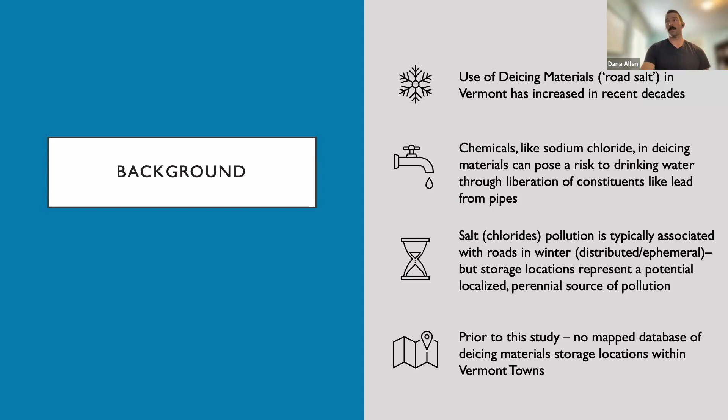But storage locations for this material represent a potential localized perennial source of pollution. So these are facilities that are there year round, that may have risk factors associated with them. And prior to this study, there was no mapped database of de-icing material storage locations anywhere in Vermont. I checked, I tried to find it for other research, it didn't exist. And so essentially that was one of the inspirations for this. We didn't have the information we needed to build on and to create other studies. So that's what we did within the Lake Champlain Basin, is created this new database.

So the study goals essentially were to survey the municipalities in the LCB, to map their de-icing material storage facilities, but not just for location, also for material type, and maybe more importantly, storage methods. Are they covered? Are they not covered? What are they covered with? Are they on an impervious pad or not? Because if we're talking about groundwater, we have to talk about exclusion from groundwater. How long have they been stored there? If it's a newer site, maybe there's no residual risk. If it's been there for 10 plus years, potentially that is a higher risk. So we wanted some attributes as well.

And then we wanted to analyze those facility locations with respect to distance from private wells and public water sources. We wanted to make an estimate of hydraulic down gradients. We'll get into that in a little bit, but that's a relatively complex thing. We also wanted to look at school water sources, because children are potentially at higher risk for some of these factors. So could we tease out any details there?

And then we also wanted to get at, are these facilities located closer to vulnerable communities? Is that something that we can actually pull out of the data that we have? And that is where the environmental disparity index came in handy for us, in trying to tease out some of those details.

So basically in today's study, we already talked about the background of the study goals. We're going to go through the methods that we used to map municipal and VTrans de-icing material storage facilities. We're going to talk about how we selected the wells and the water sources that are quote unquote in proximity, how we compared it to the EDI, and then how we determined school proximity to some of these de-icing material facilities and their wells. And so we're going to talk about the locations and descriptions of those facilities, the wells and the water sources down gradient, the results that we found with the EDI, as well as school proximity, and then briefly conclusions, but maybe more importantly, the next steps as well, because this is the first step in hopefully what will be a multi-step process.

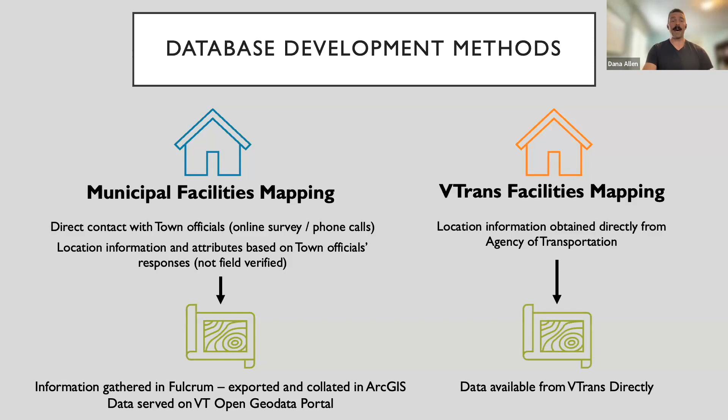So the wells and the water sources, these mapping methods, these are both publicly available layers on the Open Geodata portal. Again, can't say enough about the Open Geodata portal. We're so lucky in Vermont to have that. But the private wells are something that is held and developed by Vermont Agency of Natural Resources, and it's their water supply data composite and their water well advisory committee data.

And this is water well data that's been delivered through the water well driller licensing rule since 1966. I think that's important to keep in mind. We've been collecting these reports since 1966. Data quality may vary. So spatial inaccuracies or incomplete data are definitely part of this data set, but it's the best we've got. We've got 110,000 reports in there.

It's important to keep in mind that it's not all drinking water wells necessarily. Monitoring wells and geothermal wells are included in there, as well as wells that have been closed. And so for our purposes, we basically looked at anything that's in there. And so this could be for single family homes, public buildings, subdivisions, or public water supplies. So again, there's a lot of nuance in this data. We just looked at the locations themselves in determining proximity and down gradients.

For the public water sources, we just use the Vermont DEC's state drinking water database, which includes active and inactive public, which are community, non-transient non-community, and transient non-community water sources. These can be wells. They can also be intakes or springs. So lakes may be included in this.

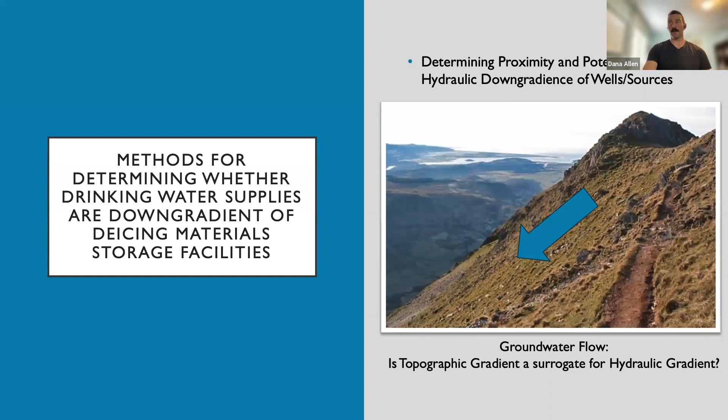And the funding for this project didn't really allow us to do any specific groundwater modeling or sampling. So we made a bunch of assumptions and we have a bunch of caveats. And we thought that this was a pretty good way of getting at the first cut of what might be down gradient. But we basically used topographic gradient as a surrogate for hydraulic gradient. Now, is that always true?

Well, the next slide, which has really high-tech animations, will kind of illustrate that. Over here, if we have water hitting the surface of the ground and all things being equal, it'll generally follow the topographic slope of the ground. And that's just sort of a general assumption. So that's topo equals hydraulic. So anything that's downhill of that rainwater, it is going to be downhill of the groundwater.

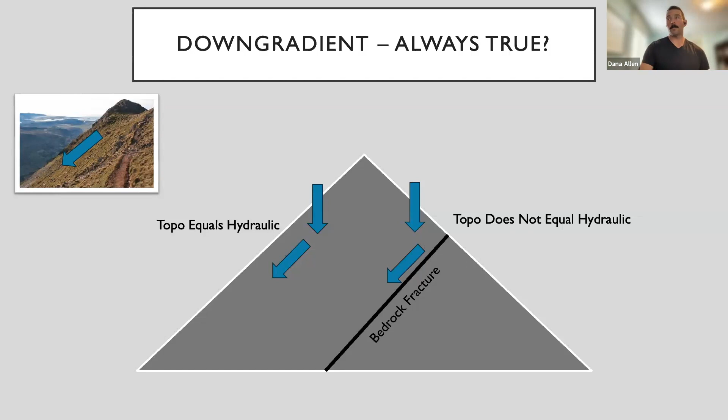Now, what happens if we get into a situation where when the rain hits the surface, it then hits a bedrock fracture, which sends it in an entirely different direction than topographic gradient? We didn't take that into account in this. We don't necessarily have the data to do that for a nearly statewide, basin-wide study like this. So topographic gradient is not always going to equal hydraulic gradient in areas of things like bedrock fracture. So that's one instance in which topo doesn't equal hydraulic.

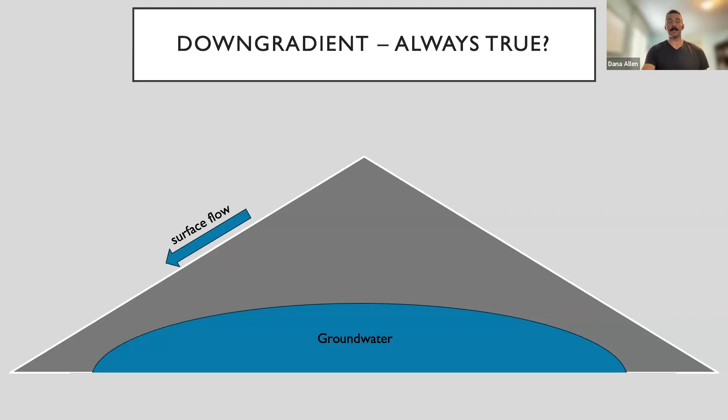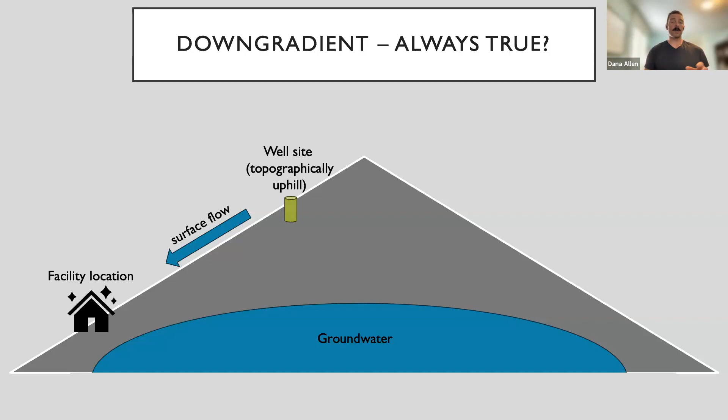So you could say, okay, it's topographically uphill of the facility. There's really no risk because it's uphill. There's not going to be any groundwater contamination from that. But that's not necessarily true because that's not how wells and groundwater work.

You could have a well that's topographically uphill of a facility that then actually taps into the groundwater that is hydraulically downhill of that facility, or down gradient. So these are the limitations of this method.

They're not perfect. They are a good first cut, and they give us a way to look at a lot of different points and get an idea of how many wells or how many private or public water sources are potentially downhill of these facilities or hydraulically down gradient of these facilities. But it's not predictive in the way that true groundwater modeling and testing would be.

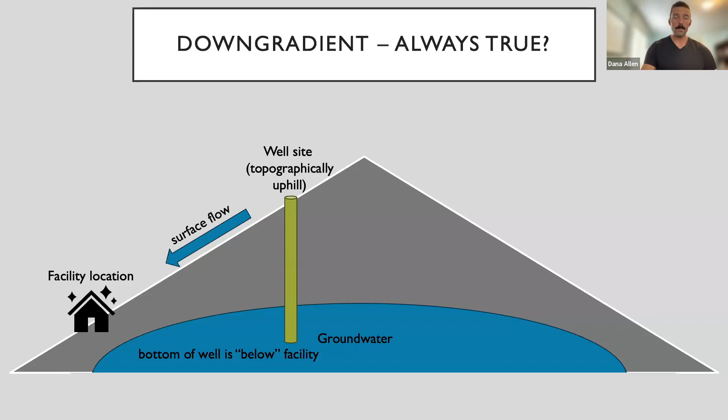So that's a big caveat with this data, and we just wanted to get that out there first in an attempt to make sure that everyone understands the limitations. So the other thing that we did here, basically an extension of this method, is saying, okay, topographic gradient stands in as a proxy for hydraulic gradient.

So we're able to assign the wells and the water sources an elevation using the LiDAR DTM. Again, we have a great statewide LiDAR DTM, digital terrain model, so bare earth surface. And we were also able to assign each facility an elevation. So then we can pretty well figure out what's above and what's below, at least based on ground surface.

And then we also used five selection distances of 30, 60, 100, 200, and 300 meters as our selection method for proximity, and we'll explain a little bit why we chose those. We also use the National Hydrography Dataset high resolution catchments for drainage area boundaries. These are really fine scale drainage area boundaries for water, so they show you where surface water flows.

Again, we're just using topographic gradient as a proxy for hydraulic gradient. We're saying, okay, if these fine scale catchments show where surface water goes, that could be a proxy for where groundwater flows. So that was our other selection method. So buffers and catchments, and you'll hear a lot about this in our data. Why did we choose those distances? Well, we chose them based on the literature.

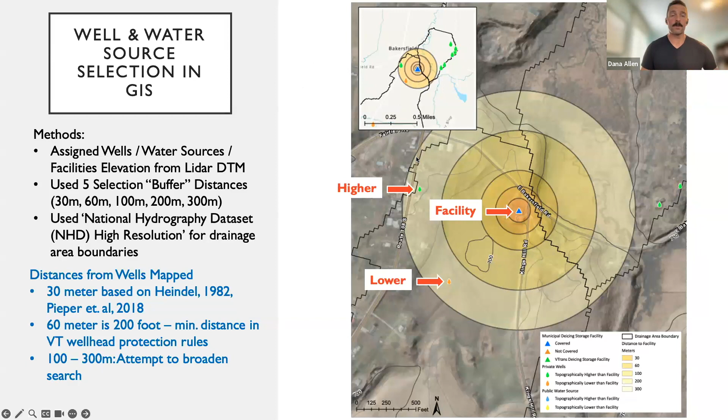You can see these are the catchments here, those high resolution catchments. We capture a few more wells. And again, these green ones here are generally higher than the facility topographically, whereas some of these little orange ones down there are lower. And so that's how our data breaks down. So those are the maps that we produced.

Getting into the Vermont EDI, this summarizes social vulnerability, and it looks at health risk factors and environmental risk factors at the census block level. And that's important to keep in mind, census block level. And so the EDI is basically environmental exposure multiplied by health risk times 0.5, plus social vulnerability times 0.5.

And you can go online. Again, this resource is huge. It's online, it's interactive, and you can see how they developed this environmental disparity index. It's a great resource. So we won't go into all of that here, just to say that we use the EDI to compare with our data.

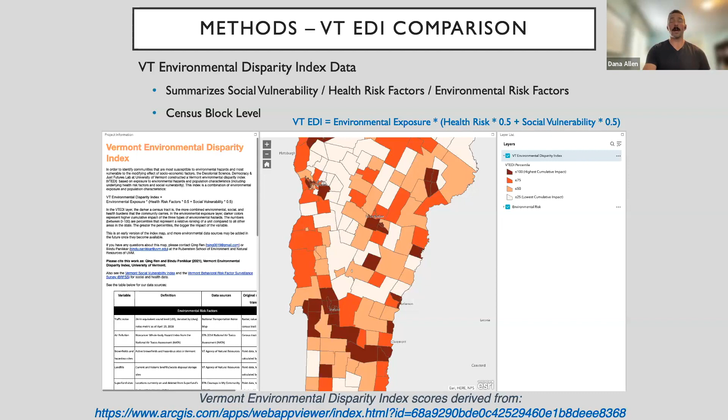I mentioned that it's at the census block level, and that's important because that's not always equal to town boundaries, especially in places like Vermont, where we kind of aggregate some of these towns into census blocks. So we essentially just join the EDI values with our town boundaries. And then we're able to select towns with mapped facilities and the associated EDI.

We also ran a near function with each well and water source, so it assigned a distance in meters to the nearest facility. And what we wanted to do with that is basically see if there was a relationship where wells that were near to facilities fell within communities with a higher or lower EDI. And so that's why we ran that near function. We'll get into that a little bit in the results.

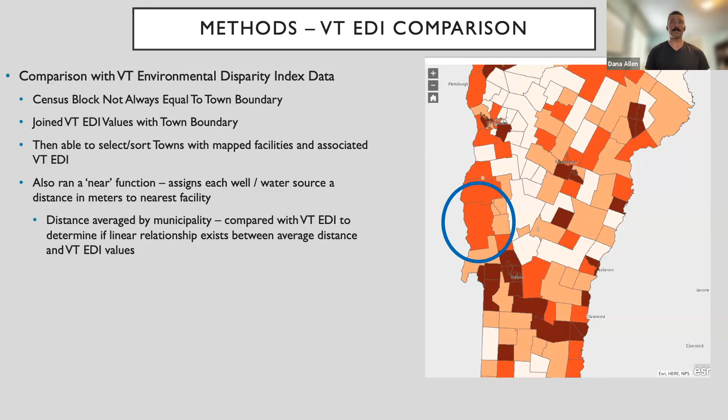We also averaged this distance by municipality and compared that with Vermont EDI to determine if there's any linear relationship between the average distance and the EDI values.

So then we wanted to look at determination of school well proximity to deicing material storage facilities. We did our best to pick out the relevant data from the private wells and the water sources database, and essentially just keyworded where the owner's or purchaser's last name contains school, or where the water source system name contains school.

And so that was how we derived the water sources for those locations. We'll talk a little bit about that in the next steps, but just keep in mind that there's no mapped database of school wells or water sources that we were able to leverage. It's just leveraging those same two databases and picking out what we could pick out.

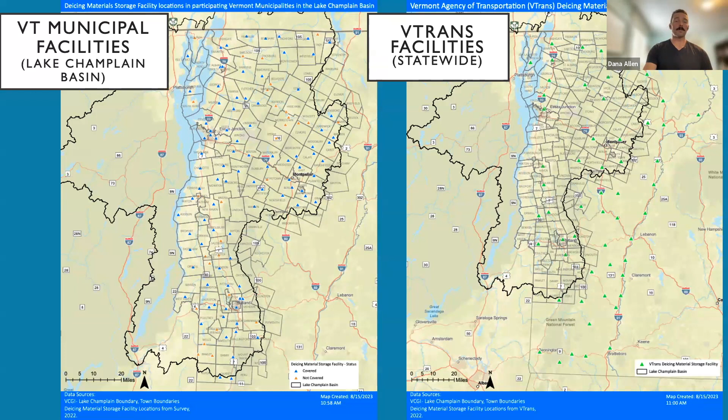So from all this, we were able to create essentially two overarching maps, one of the Vermont municipal facilities within the Lake Champlain Basin, to signal whether they were covered or uncovered, and then a similar product for VTrans facilities. We'll talk about the difference, but you can see that these are the overarching maps that we were able to create of those two different data sets.

So for the municipal facilities results, we essentially picked out 126 muni boundaries in the Lake Champlain Basin. Of that, there were a couple of gores, so they don't really have a formal administrative structure. One, St. George, had no road department. They only have 2 miles of road, so they rely on a private contractor. A couple of towns share facilities. One town chose not to participate, and 2 towns, despite repeated contacts, didn't respond back to us.

Again, Oscar, thank you for your diligence. Sometimes people don't answer the phone.

So basically, at the end of the day, we have 122 facility locations over 118 towns. 4 towns have 2 facilities. 43 towns store multiple materials, so things like salt and sand, as well as road salt. And so that basically gives us 170 individual material piles throughout the basin.

36 of these, or about 21%, within 29 towns are uncovered. But the majority of those, at least from what we were told, are salt and sand piles, or 8 of them, they say, are only sand or sand and gravel piles. So in terms of materials, this kind of makes sense. If you leave salt out in the rain all the time, you're not going to have salt after a certain period of time.

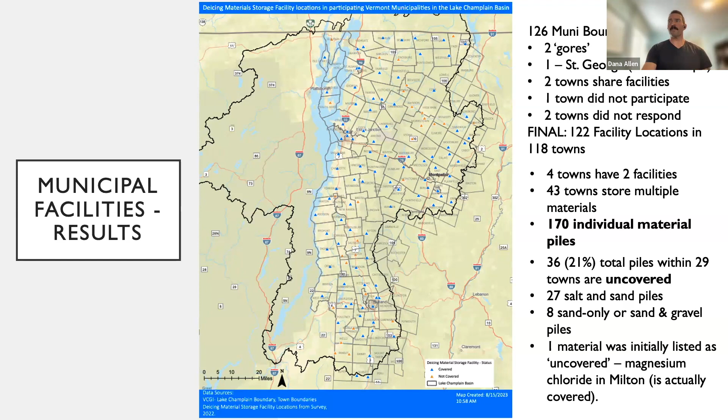One material pile was initially listed as uncovered, but actually it's a magnesium chloride store in Milton and is actually covered. We checked with them. So the results are a little bit off there, but we figured it out.

For VTrans, they have 124 facilities across 63 towns. This is both in the Lake Champlain Basin and without. The specific attributes for all of these weren't provided, so coverage method, pad type, storage duration, material type. But in conversation with VTrans, they state that all of these piles are covered and on impervious pads. So basically best practice as far as that goes.

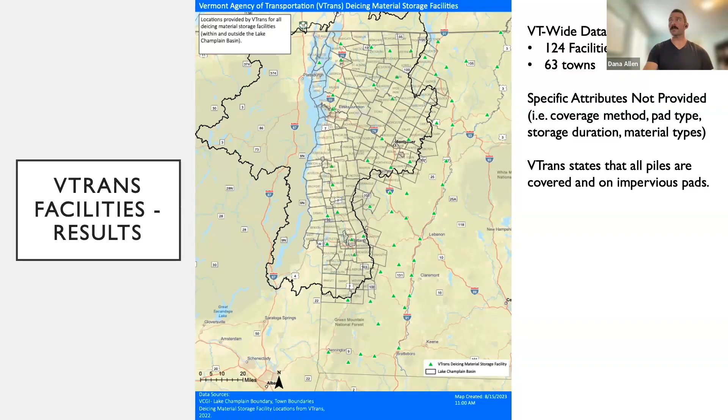What are the material types we're looking at? Most are sodium chloride, road salt. 24 piles are salt and sand. Not a lot of potassium chloride, one of those. A few magnesium chloride.

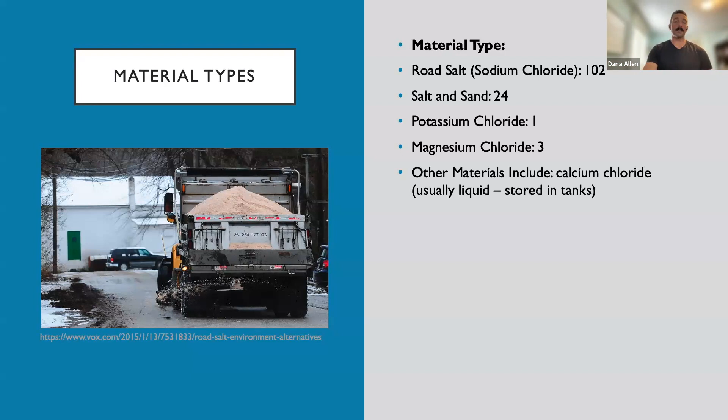Potassium chloride and magnesium chloride are often used at different temperature gradients than road salt, so not as common. And other materials include calcium chloride, which is usually liquid, so that's a brining solution essentially. So that's going to be stored in tanks, so by definition, kind of covered.

We found that for the most part, these sites have been active for 10 plus years. 151 sites, I should say sites, not towns, have been there for 10 plus years. Coverage method is typically structures. 127 piles are covered by structure. 7 were covered with an impermeable membrane, so a tarp essentially. Most are on pads. Pad type does vary, but at least most of them are on these pads. So it's preventing material, if there is some level of water intrusion, from getting into groundwater.

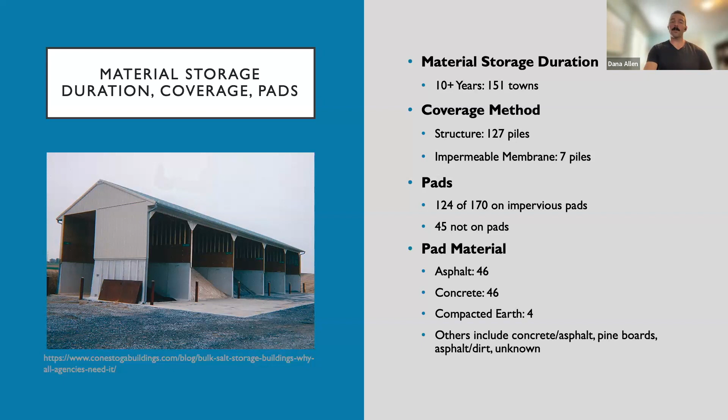45 are not on pads. Most pad material is either asphalt or concrete, or maybe a mix of the two. There was some compacted earth, a couple were concrete and asphalt. One was listed as pine boards, which we chose to look at as impervious, but that's a bit debatable. Asphalt and dirt, depending on level of compaction, could be effective, and some are unknown just because it's covered and they don't know what's under there.

So for our wells and our selection methods, remember we had those distances and we had those catchments. We found basically 1,600 wells within 300 meters or within the catchment, and 44% of those were topographically down gradient of the nearest facility. 1,076 of those were in a catchment, and 63% of those were topographically down gradient of the facility.

And we basically tease that data out because within those catchments, we feel like that's potentially a higher risk just because of the topographic gradient. Basically, all surface water is running down to those down gradient wells, so they potentially deserve a higher level of scrutiny. Again, with the caveat that hydraulic gradient isn't always equal to topographic gradient.

We only found 15 wells within 30 meters of facilities, so that's in some ways encouraging. Again, 589 wells were within 300 meters. So remember, we kind of broadened our search distances to 100, 200, 300 meters. So we're not seeing a ton of wells within 30 or 60 meters of these facilities. That said, there are still 46 within a couple hundred feet of these facilities. And if we're prioritizing wells for testing or additional scrutiny, those might be the 46 to start looking at. So at least this gives us a first cut.

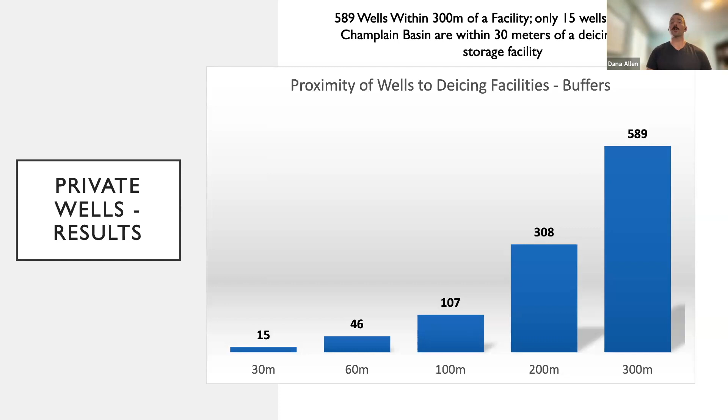For public water sources, we had 51 public water sources within 300 meters or within an NHD catchment, and 63% of those were down gradient of the nearest facility. And so again, not a ton of sources, but we do have a bunch that could potentially be ripe for additional scrutiny.

And so now I'm going to turn it over to Stephanie, who's going to go through some of our additional results in terms of the maps that we created, as well as the EDI data.

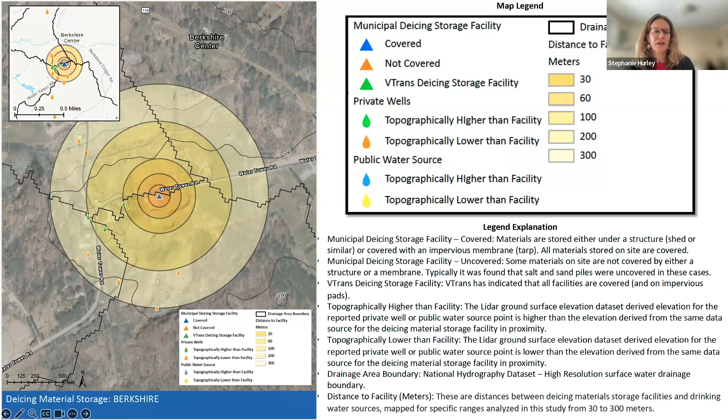So Dana already reviewed how to interpret the maps, but I'm just going to go over it a little bit again, because this is one of the products. In addition to the database, we did create one of these bullseye style maps for each town. I will show you at the end of the presentation how to find those maps. But looking at this particular example here, now that you understand what's covered, what's not covered, covered meaning having some kind of roof or membrane on top, and not covered lacking those.

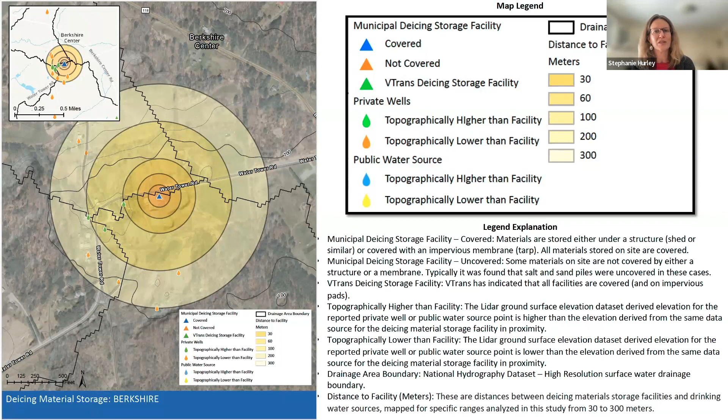You can see in this map example here, you've got multiple drainage area boundaries, those catchments Dana referred to, as well as topographically higher than facility and topographically lower than facility. This is on a ridge, so it's kind of surprising which way is topographically above or below. And these legends are shared for all the maps. It's the first page of our map appendix, and the legend is going to include the same information regardless of whether, for example, this site has no VTrans facility, but the VTrans legend is still there. Next.

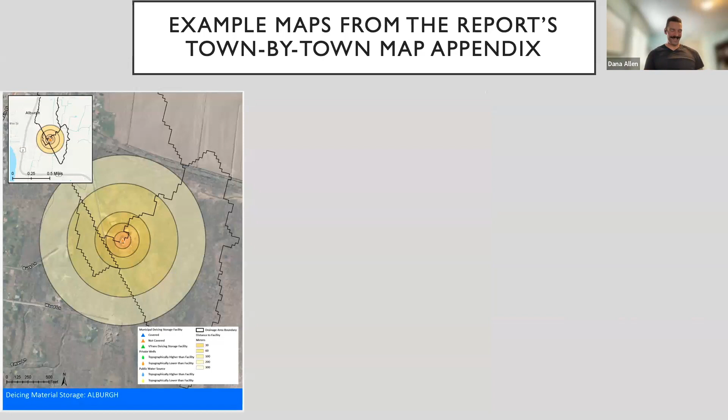Go ahead. This next example, this series in Alburgh on the left. Dana, wait and click when I say. Okay, I want to walk through at a different pace. Alburgh has an uncovered pile. It's that orange triangle in the middle, but you can see that there's actually no wells within even the 300-meter band around that, and multiple catchments in a relatively flat area.

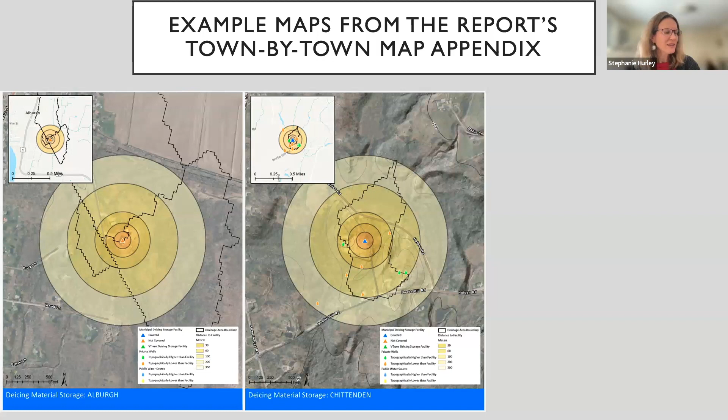Next. Looking at Chittenden, there's a smaller catchment area, and the entire catchment pretty much is within that 300-meter band. So the distance rings are relevant as well within that catchment. And there's a mix of some above and some below, but not too many in this area are meeting all those criteria. And there's a couple though within that 60 meters. This is one of those areas where the 60-meter, AKA Vermont's wellhead protection 200 feet rule, would actually potentially flag a couple of these sites as a salt pile close to the wells.

Next. And this one I just wanted to show as one of the examples where it gets complicated, because we have in the same map 2 VTrans storage facilities as well as a covered municipal storage facility. And so the rings start to overlap and get more dense in certain areas. And so all of this has to be taken into account when you think about site context. So these are just 3 examples, but these maps, I think 118 total for the project sites.

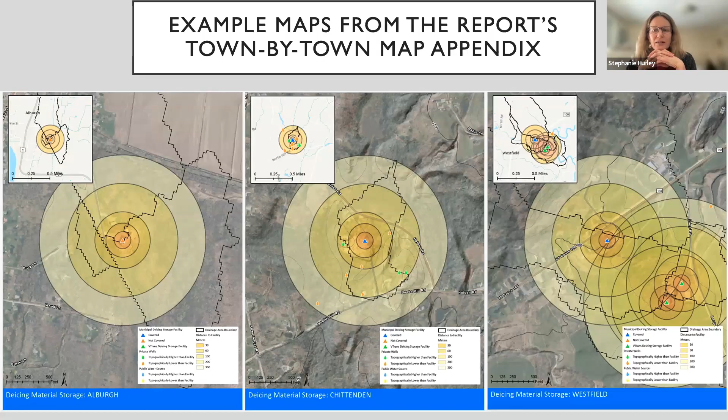Next. Okay, so again, as Dana really described so well, we very much were thinking about who might be the most vulnerable? Is there an instance where, if we're going to do water testing, we want to make sure to consider vulnerable populations before others? And so in the environmental disparity index developed for Vermont that's cited here, the higher the number and the darker the color on the map equates to the higher environmental justice, environmental health risk for those communities. And again, it's at the census block scale, as opposed to municipal scale. So we worked around that a little bit. But one of the maps in our report shows all the VTrans locations, the municipal locations, and how they fall within the relative EDI score category.

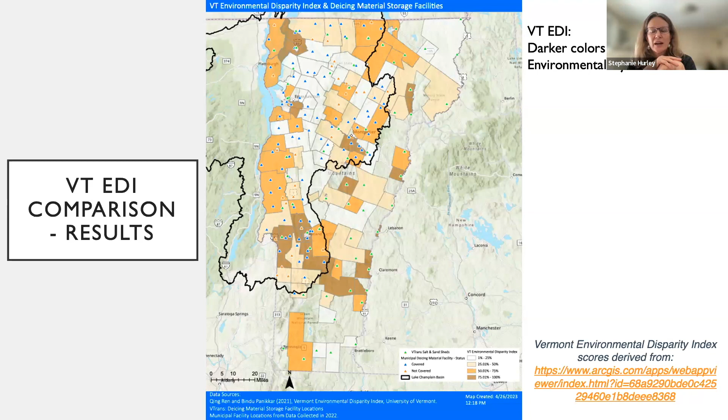Next. So this was a way where every municipality that was in our study is placed along the x-axis across the bottom here. We didn't have room to name all the 100+ towns. But the furthest to the left is the highest environmental disparity score, so sort of the worse off towns from a community vulnerability standpoint. There are more vulnerable people in the population of that municipality based on the map, and the lowest vulnerability on the right. We plotted that with these green dots to represent the distance in meters between wells and de-icing facilities.

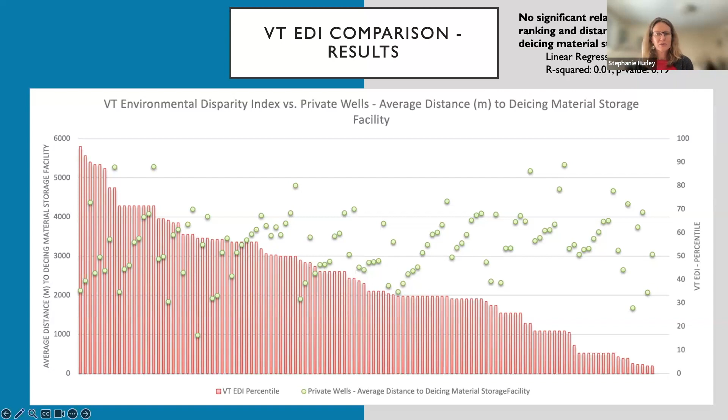So you can kind of see here, there's not much of a trend. And we also show the significance, or lack thereof. There was no sort of linear relationship where perhaps we would say more vulnerable communities live in places where salt storage is near their wells. So we did not find a trend there. Next.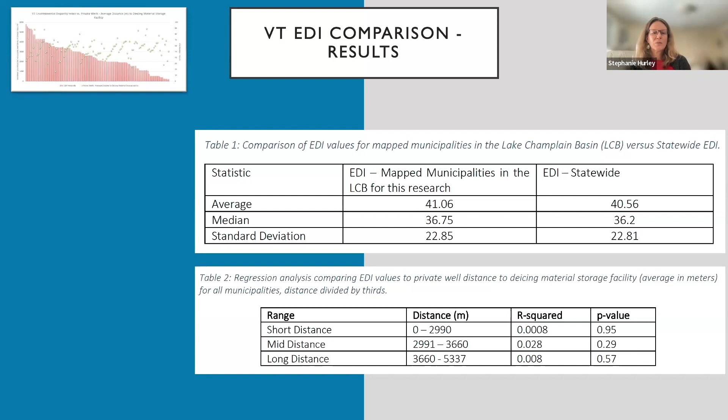And then in the second table, we looked at maybe there is a trend, and you can see from the R squared and P values, we did not find a trend, but we did want to consider maybe there would be a relationship at the shorter distance, the mid distance, or the longer distance between facilities and well locations. So Dana described in the methods how all wells in all municipalities were run as a, quote, near function. And that near function helped us determine these approximately in thirds distances. And again, there was not a relationship where you could say vulnerability as measured by the environmental disparity index correlated with closer or further distances from wells statewide in the municipalities that we looked at. Next.

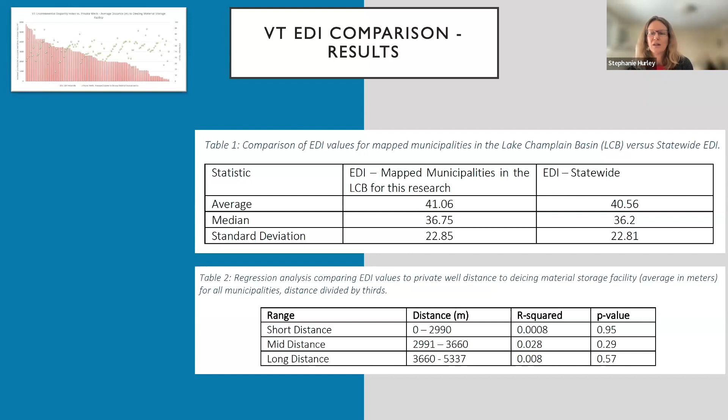So, however, even though we didn't identify a statistical relationship, we still think that using the environmental disparity index is a valuable lens where we can look at prioritizing towns. So if a town is high on this index, those are towns where if there is going to be well water testing or public water source testing that potentially connect to the infrastructure for vulnerable people, it makes a lot of sense to start with those towns.

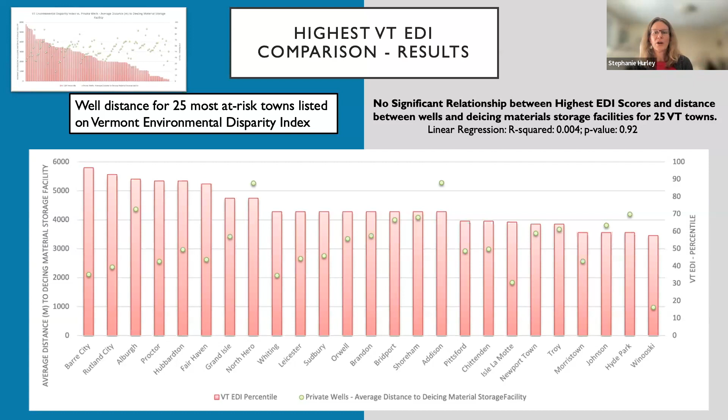Again, this is census block scale data, and so we had to ascribe sometimes multiple towns into the same census block, so that's an important caveat. But in the meantime, this index confirms that there are proportionally more individuals in some towns than others that are likely to suffer from other environmental factors, and it, to me, makes a logical prioritization scheme for any future water testing. Next.

Okay, so schools, another potentially vulnerable population based on school children's ages and so forth. We found there were 54 private wells in Lake Champlain Basin potentially associated with schools, and 2 within 30 meters of a school's well or a possible school's well. And I can talk about these possible caveats within that 30 meter to 300 meter distance, or within the catchment. So there's only a couple schools where it's really close.

They're not on this slide, but one of them is actually Yestermorrow, which is more for adult education. It's Yestermorrow School, so it showed up in our data, which is 55 meters between a salt storage facility and a well. And then another one is in Plainfield, in Twinfield School District, and it's within the same catchment, but 1,500 meters away and 100 meters topographically above. So we're kind of less concerned about that particular example.

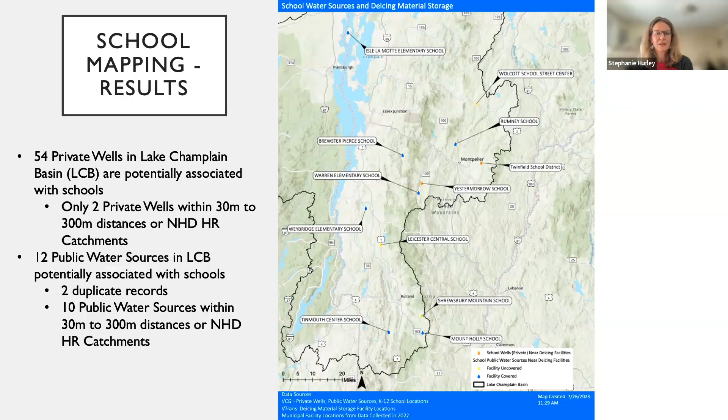And then the next is Mount Holly School, where it's covered, but it's closer to the facility. It's 68 meters between the well and the facility, which is still bigger than the wellhead protection limit of 60 meters. Next. Okay, so I'm going to go through some conclusions. I know we've thrown a lot of information at you, as well as quite a few caveats and contextualizations. So go right ahead to the next slide, Dana.